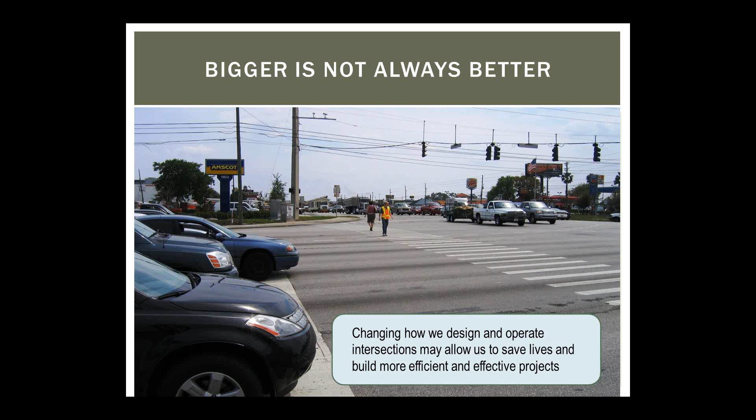So the traditional fix of building bigger intersections - bigger is not necessarily better. Bigger can be faster, bigger can mean more crashes. And from a pedestrian standpoint, I feel sorry for these poor people, they have to pack a lunch basically to cross from one side of the road to the other. So these innovative designs allow us to change how we think about intersections, how we operate them, and they can allow us to build not only safer intersections, but also more practical intersections.

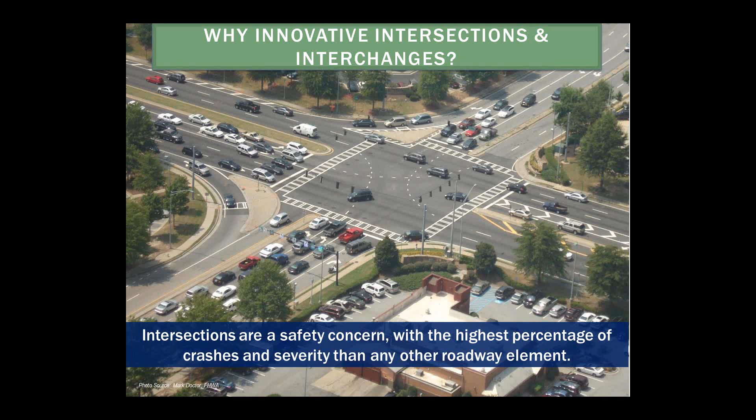Intersections are a certain safety concern. We know that about half of all severe crashes occur at intersections, based on national data. And if you think about it, an intersection is merely a point on a map - it is a very small percentage of the overall miles of the highway system out there. But yet, intersections account for about half of the severe crashes that occur on our networks.

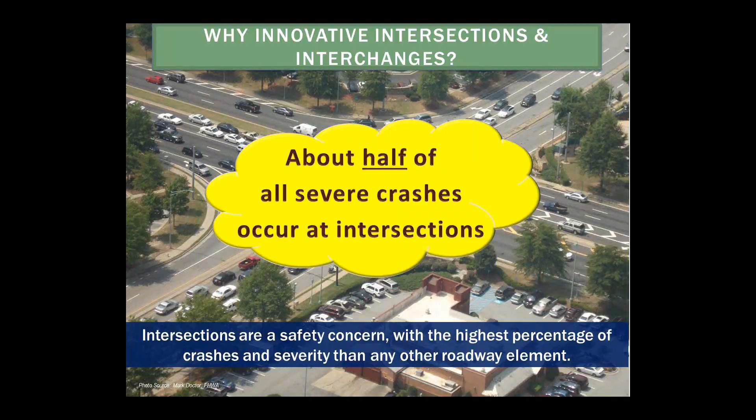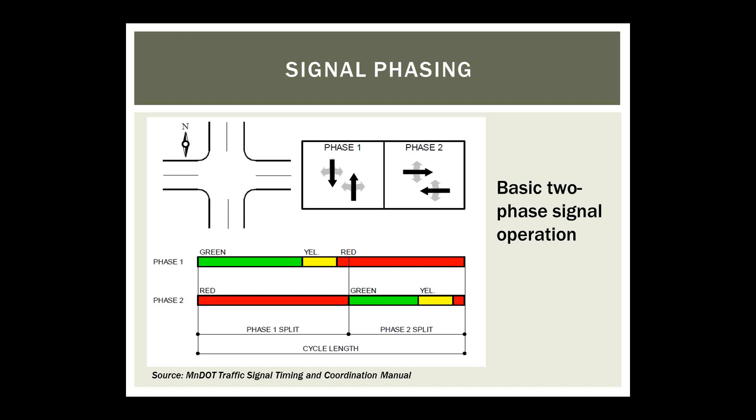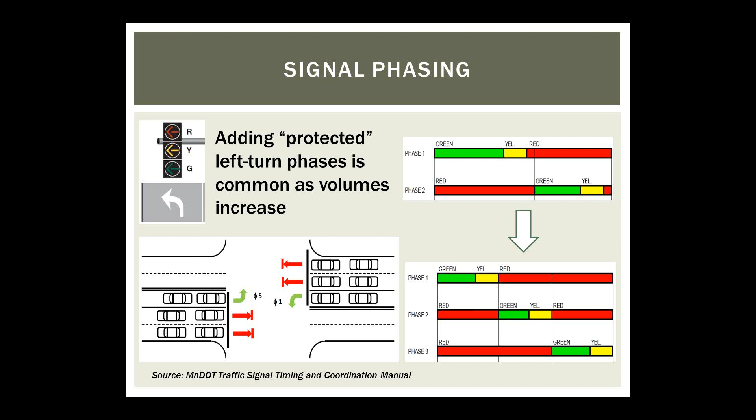What typically happens at intersections when the volumes start to pick up, especially the left turn traffic demand, is we add a protected left turn phase - that's the green arrow. And anytime we add a phase to the intersection, we are essentially eating into the amount of green time available to the other movements.

So if we think about providing for all the movements at an urban intersection: we start with a protected left turn phase for the major approach, add a yellow clearance interval and then maybe a little all red, then let the through traffic proceed in that direction with some green time, terminated by a yellow clearance interval and an all red. Then we go to the minor street - sometimes the minor highways have a lot of traffic as well, so we provide a protected left turn phase for them with green time, a yellow clearance interval, an all red, and then the side street or minor highway through movement gets their green time, followed by a yellow clearance interval and an all red.

So if you think about it, we're basically allocating time, allocating pieces of the pie, and no matter what our cycle length is - whether we're dealing with 120 seconds, 180 seconds, or sometimes even greater - long cycle lengths can work against us as well. They can really create lengthy queues while folks are waiting for the light to turn green. But no matter what cycle length we're dealing with, there are only so many seconds within that cycle length, and we have to figure out how to carve it up.

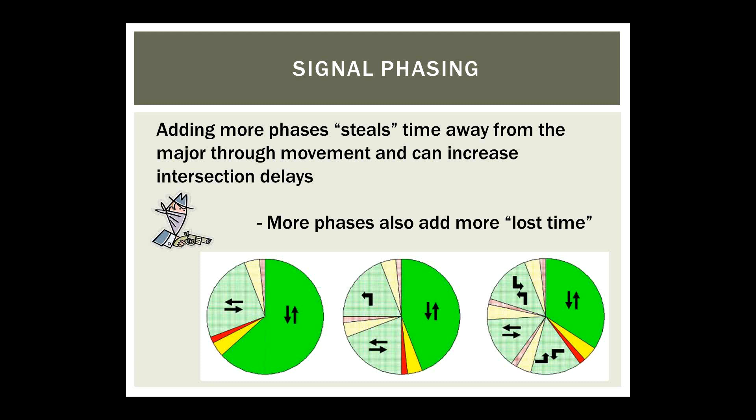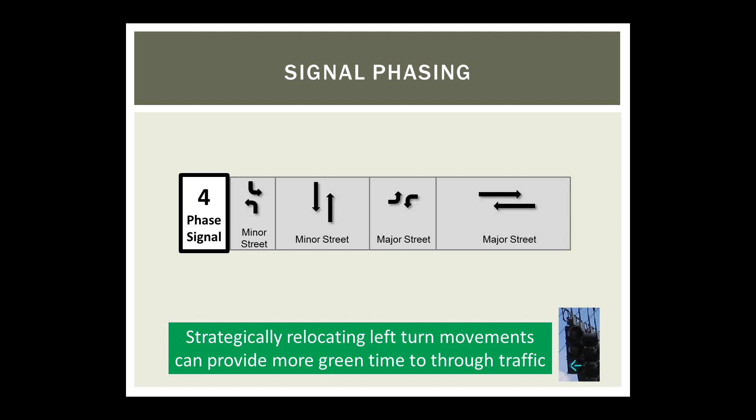So what we try to do with many of these innovative designs that involve signalized intersections is basically tweak the signal timing and come up with creative ways to handle the left turn movements. So, being able to take the typical 4-phase operation with the protected lefts from both the major and minor, and strategically alter that by relocating or redirecting the left turn movements, handling them in some other way, and getting back down to a 2-phase signal operation.

It gives more green time to the major street through movement. And it may seem like a trivial thing, just adding an extra 15 or 20 seconds of green time to the major street through movement. Well, it's not trivial. That additional green time has almost an exponential function where the benefit, the reduction in delay, increases greatly if we can provide additional time to keep the major street moving.

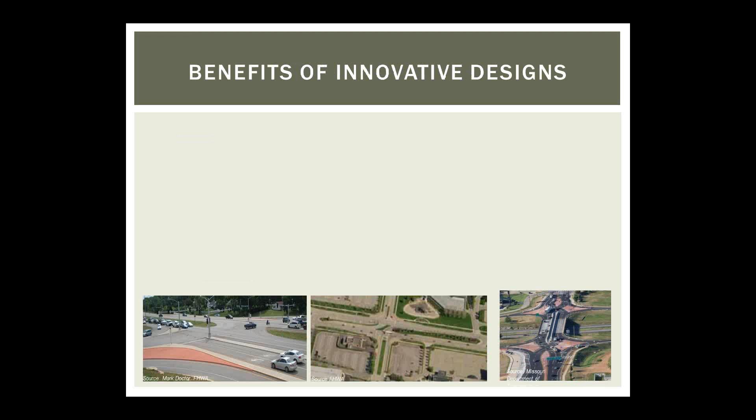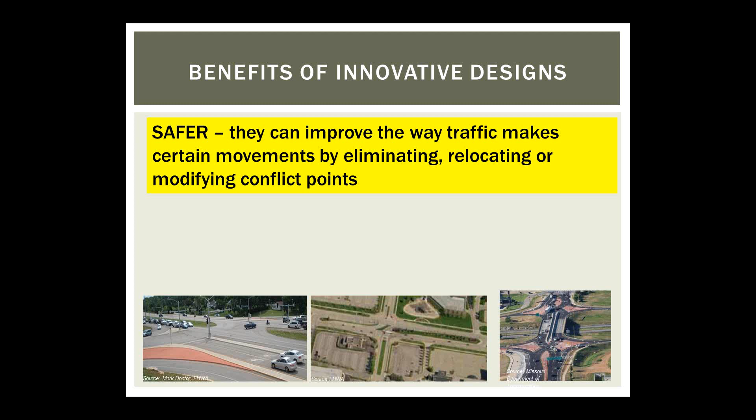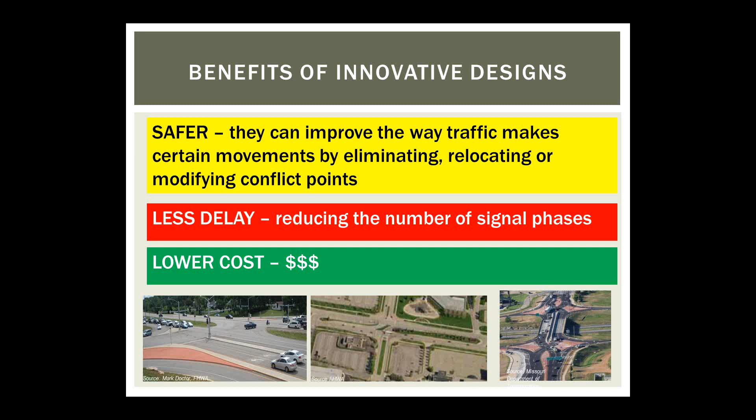So these innovative designs, many of them do involve improved operations, but at least the ones we're going to talk about today have also been proven to enhance safety and reduce crashes by reducing the conflict points or the type of conflicts that occur at the intersection. So not only are they safer and do they offer less delay, but in many cases these can also be lower cost alternatives. I almost sound like an infomercial, but wait, there's more. So in addition to safety, we have better mobility, and often at lower costs. That's really the exciting thing.

So just in summary for this quick introduction about signal phasing: fewer phases are better, and it's usually the left turns that are problematic. If we can get down to a 2-phase operation, that can be a really good thing. So my mantra for many of these designs to consider is 'all rights is all right.' All right, the jokes keep getting worse, but I want you to keep that in mind. So an intersection where we have the right turns and a displaced left turn can be really, really advantageous.

So let's think about some of the common issues, especially from a safety perspective. In this case, let's take a 4-lane divided arterial, a higher speed condition—it could be more of a rural highway, 4-lane divided, open median. We have a minor street intersecting with a major highway, and the minor street has stop control. The major street is uncontrolled, but coming from the minor highway, you have a stop control.

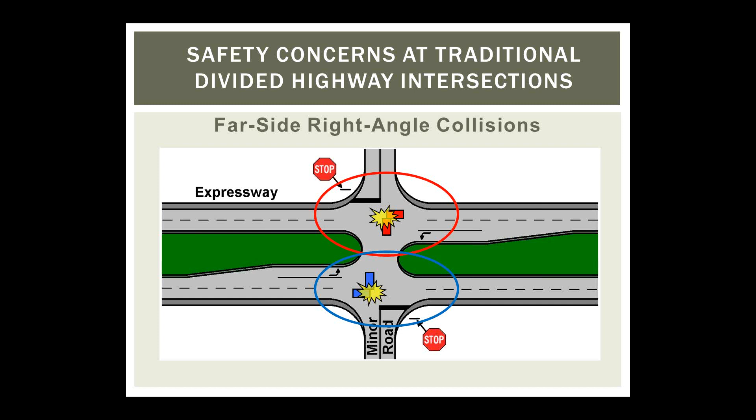So one of the very common safety concerns at this type of intersection is far side right angle collisions. As drivers, we do an okay job of assessing for gaps in the near side of traffic, but where we sometimes struggle is in the far side when executing either the left turn or the crossing maneuver, and so we oftentimes see a lot of far side right angle collisions. They tend to be high speed and high severity crashes.

So one of the safety mitigation strategies, and one of the innovative intersections that can be applied in that type of scenario, is the restricted crossing U-turn, the R-cut, but it goes by other names. It's also known as the J-turn intersection, and it also goes by the name of the reduced conflict intersection—in Minnesota, MnDOT utilizes that term, reduced conflict intersection, which seems to go over well in terms of marketing that to the public. It's also known as a super street in North Carolina; you'll hear them refer to it as a super street design, or sometimes the synchronized intersection.

But no matter what we call it, it is an at-grade intersection with a directional median, and the directional median requires that traffic coming out of the minor highway must make a right turn and then a U-turn to come back if they wanted to make either the crossing maneuver or the left turn onto the major highway.

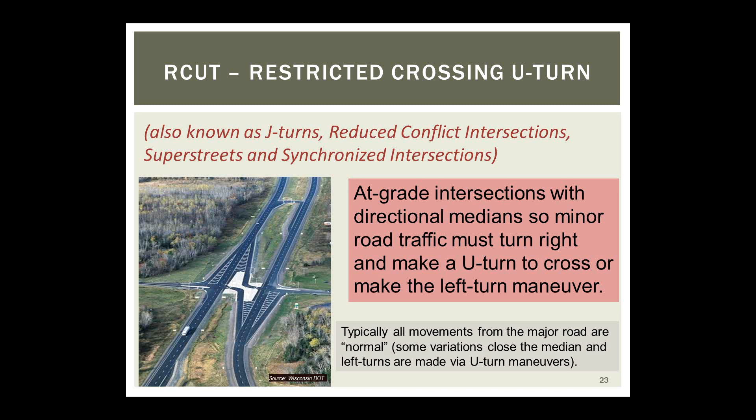Now from the major highway, all movements are permitted. From the major street perspective, you can make a right turn onto the minor highway, you can make a left turn onto the minor highway, and obviously you can keep going straight through. The only difference is for traffic coming out from the side street—the only possible movement is to make a right turn, and if traffic wanted to make a left or the crossing maneuver, they would utilize the downstream U-turn bay to come back. So that is the key difference.

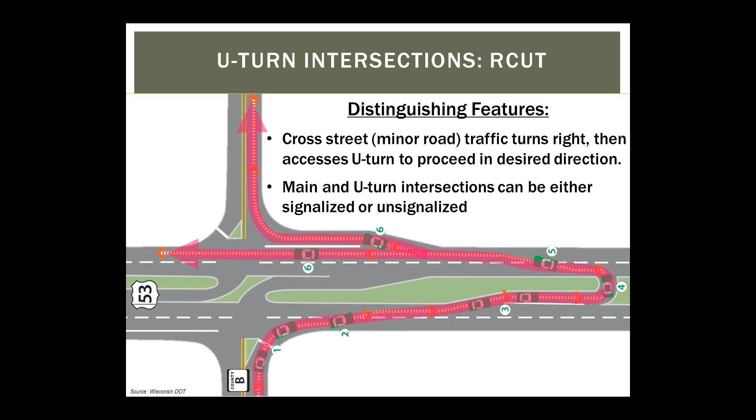Traffic coming out of the minor highway makes a right turn and then utilizes a downstream U-turn maneuver to come back to either execute the crossing maneuver onto the other side of the minor highway, or what would be a left turn. This can be applied at either an unsignalized intersection or a signalized intersection that creates gaps for traffic coming out of the minor street.

So when thinking about this type of intersection, I'll refer to it as the restricted crossing U-turn, but it does go by other names. It's a traditional intersection from the perspective of traffic on the major highway - through, right, left turns can all be made. The only difference is coming out of the minor street, the indirect movement would be for the left turn or for that crossing maneuver. This type of intersection can be applicable at a signalized or unsignalized intersection.

It can be in a rural application, a suburban corridor, such as a signalized arterial. Probably not going to see significant application in the urban center, primarily because of the type of highway we're dealing with and because we may not have the space. That's not to say it couldn't be possible, but more than likely this is going to be a suburban type of corridor, and primarily on a high-speed, multi-lane arterial, probably not on a low-speed route, although the concept could have application. That's why I put the question mark there and not necessarily a no.

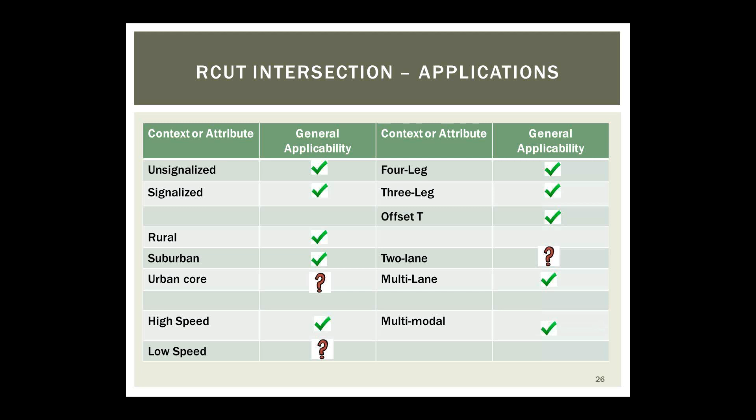These can be utilized at a four-leg intersection, three-leg intersection, T intersections, or offset Ts as well. Primarily going to be multi-lane highways, although some agencies are looking at similar concepts even on a two-lane highway, one lane in each direction. But we haven't seen anything built to this point. And yes, all multimodal features - we'll talk about how pedestrians and bicyclists can actually benefit from this design.

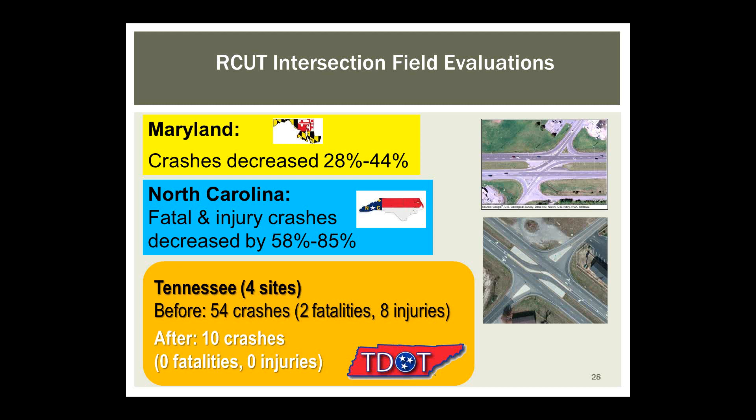All right, so the states that have implemented this design have seen very impressive safety results. Maryland has utilized this design for many years, and crashes decreased on the order of 28 to 44%. North Carolina has had many successful implementations, 58 to 85%. These are great numbers - crash reductions that rival roundabouts. And Tennessee has a few examples with very impressive safety results as well.

Now there is a slight distinction between the unsignalized version and the signalized version. In North Carolina they would call this the super street. Here's an example where traffic coming out of the minor street has a gap created by the signal, and the U-turn location further downstream is also controlled by a signal. So even though in this application you would think the arterial now has an added signal, the reality is traffic on the arterial only stops once.

The signals are tied together, they are coordinated, and once traffic proceeds through the first signal on the arterial, they would then proceed through the main intersection downstream. So traffic only stops once.

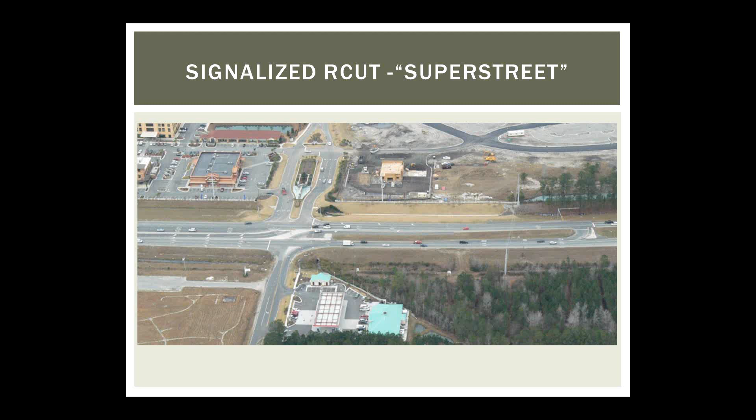In addition to being a great safety application in the rural environment, they're also very useful when we have a proliferation of four-phase signals because of new development. So new big box stores start to pop up, and what was perhaps previously a four-lane arterial that could really move a lot of traffic now is starting to see signals pop up everywhere to handle the new development.

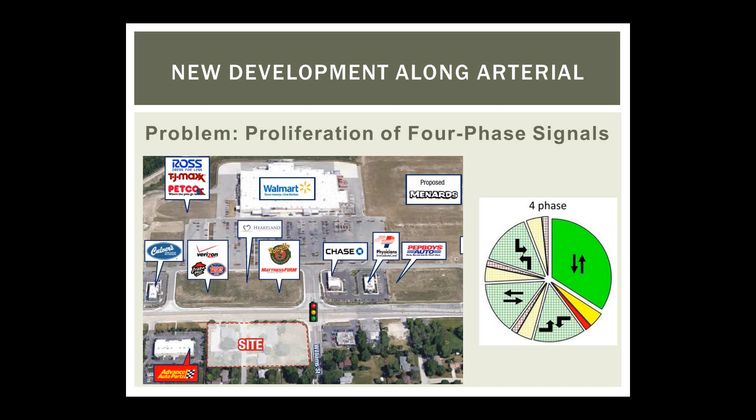Rather than traditional four-phase signals with protected lefts that can quickly bring that arterial down rapidly, if we were to go to a corridor of two-phase signals, the super street type of design really opens up a lot of advantages operationally. Instead of giving time to protected left turns, with the super street operation we're down to two phases - the right turns out of the minor highway take place concurrently with the U-turn maneuvers, so it is just a two-phase operation.

Even though there are essentially four signals now involved, they are operating essentially as one. By bringing it down to two phases, it may actually open up the possibility of a shorter cycle length, and that shorter cycle length gives us even better operational advantages as well.

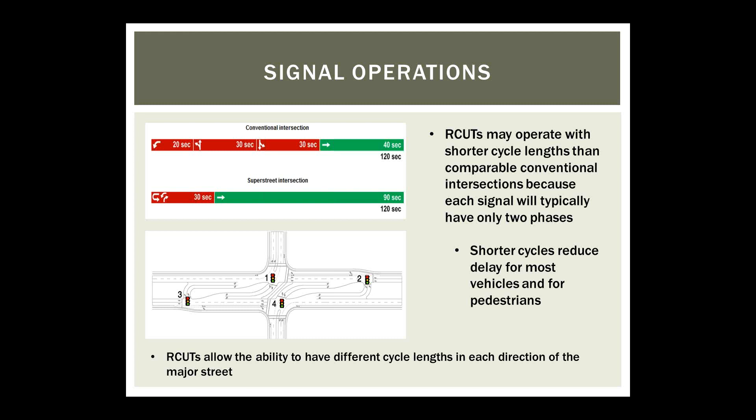If we put these in a corridor type of application, another advantage is that at no point do we need to stop both directions of traffic at the same time. In this example, you see an eastbound and a westbound on the major arterial. Those movements essentially can operate like one-way pairs. We never really need to stop the two directions simultaneously like we would at a traditional intersection to provide for the left turns out of the minor highway. So each direction may operate essentially independently.

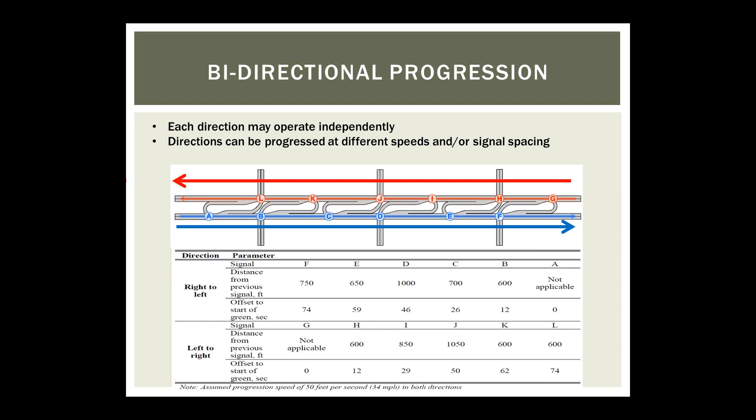What that allows is some very innovative signal timing design. It's a lot easier to coordinate progression on a one-way street than on a two-way street, and other innovative things could be applied. Let's say we're in an urban area with a very heavy directional split. Maybe in the morning peak, traffic is primarily heading in one direction, and in the afternoon it reverses. It's even possible to utilize different cycle lengths for the two different directions and alternate it by time of day. So all kinds of innovative, flexible signal timing opportunities are opened up when we implement this type of design in a corridor.

So what about for pedestrians? It's certainly a little different, and that depends on which movement we're talking about. For a signalized restricted crossing U-turn, it essentially utilizes this Z-shaped pattern for the pedestrian crosswalk.

To cross the minor highway, if we wanted to go say from A to B or C to D, that could actually be a shorter crossing distance, and the pedestrian could get from A to B or C to D probably in less time compared to a traditional intersection. But there's a disadvantage, say, to go from A quadrant to the D quadrant. There's an extra crossing involved, and to go from one side of the major highway to the other involves going out into the median, typically done in 2 stages.

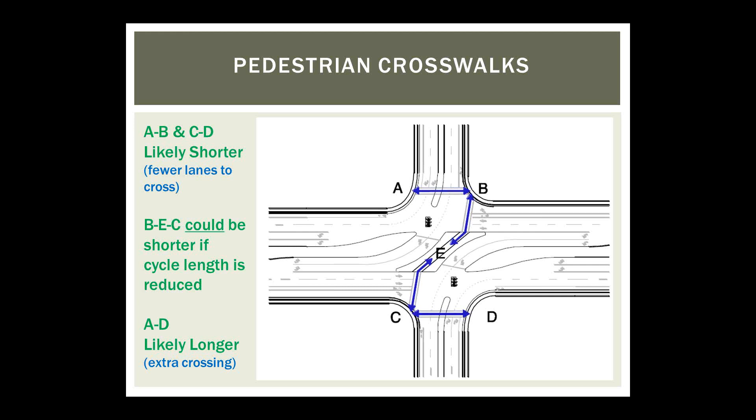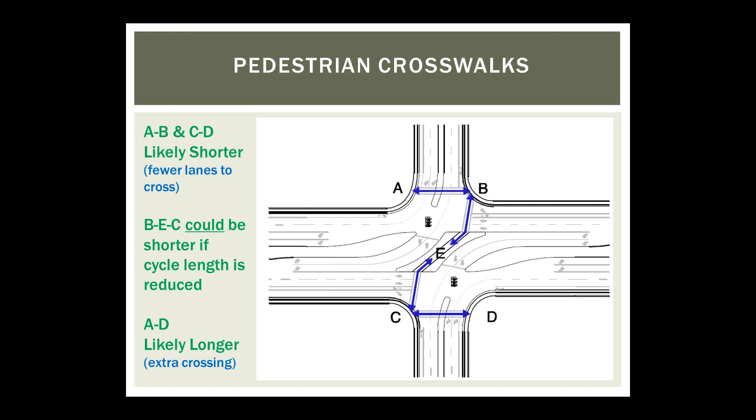So the question of whether it's longer or shorter for pedestrians - it depends. A couple of the crossings are probably going to be shorter, and the B to E to C crossing may actually be shorter, especially if we can bring the overall cycle length down. But the A quadrant to D quadrant crossing most likely is going to take longer because there's an extra crossing involved. But this is generally what it looks like, and you can see the pedestrian going out into that center channelized island.

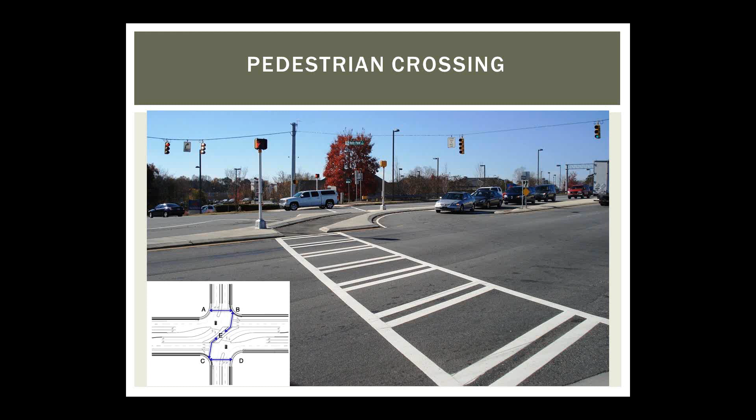It's one of these things where until you experience this intersection as a pedestrian, it may look intimidating. And I want you to be skeptical - I want you to think, how is this really going to be for pedestrians? Well, the reality is, if you get an opportunity to walk through one of these intersections as a pedestrian, I think in most cases you might be pleasantly surprised. We have to also keep things in comparison, because we're talking about a big, busy intersection. I want to compare apples to apples - we're not talking about a low speed, low number of lanes intersection. So in comparison to other high volume type intersections, I actually think there are many opportunities to design and create some pedestrian advantages with this type of intersection.

Let me show you some examples of how we can even enhance things from a pedestrian standpoint.

If we have the opportunity to go with an offset type of intersection—for example, in a corridor where development is just starting to occur—we have choices as to where we might locate this driveway entrance to a big box store seeking a permit, with the development still in the planning stage. So if we have opportunities in terms of where we locate these approaches, we can create an offset type of option.

This actually allows the pedestrian crossings to be more intuitive, and the median could be utilized as a pedestrian refuge area. So something like this, with the offset approaches option, makes the intersection more traditional from the pedestrian standpoint, and can actually be a very pedestrian-friendly type of intersection option.

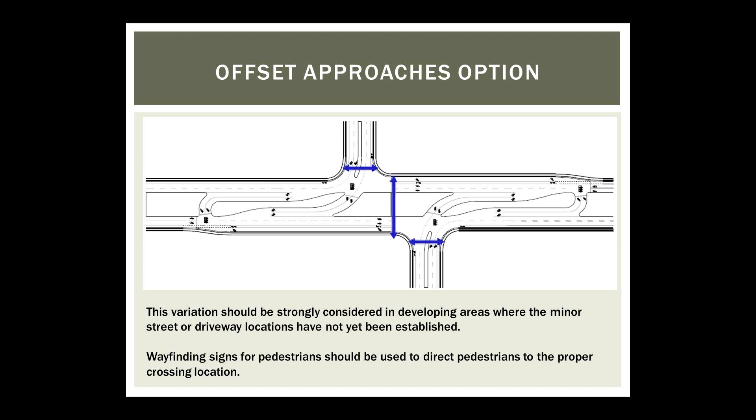Another consideration for pedestrians is at the locations where U-turn movements are occurring. If those are signalized, and traffic on the major arterial is going to be stopped to allow for the U-turn maneuver, it opens up the possibility of having mid-block pedestrian crossings that really don't hinder the traffic operations.

So adding mid-block pedestrian crossings without adding any delay, essentially, to vehicular traffic gives us an opportunity to perhaps make these designs even more beneficial to pedestrians. These mid-block pedestrian crossings will not interfere with the signal progression.

So if we had, say, a bike lane from one side of the minor street going to the other side, crossing the major highway, or if a bicyclist wanted to make a left turn—essentially the left turn from the minor street to the major street—that's where we have the differences.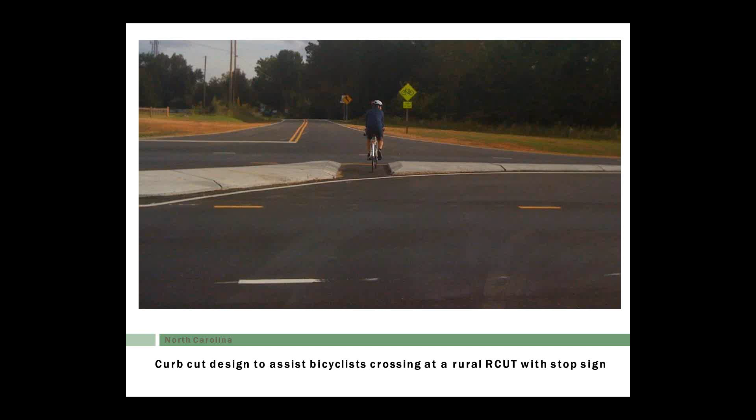But again, remember, from the major street perspective, there are no differences from the bicyclist perspective—everything is the same. It's only how minor street bicycle traffic may be affected.

So that's a description of the restricted crossing U-turn, or the J-turn. It goes by many different names.

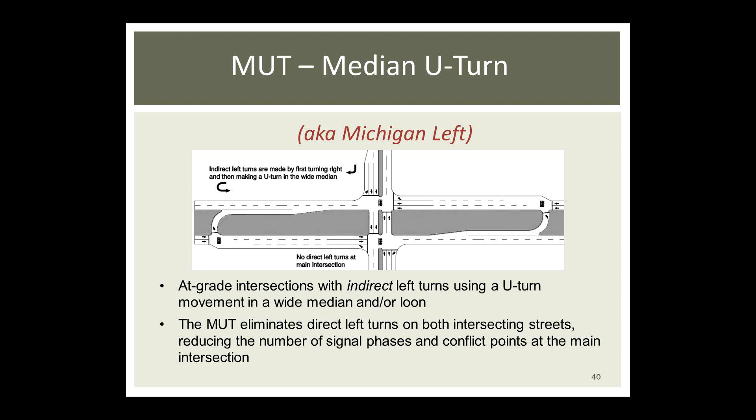From the minor street, if traffic wanted to make the left turn, they would make the right turn, utilize the U-turn bay, and come back, similar to the restricted crossing U-turn. But the key difference here is now the minor street through movement is permitted. So the major highway through and the major highway right are the same as a traditional intersection.

What's different is the major highway left turn. That's now made with that indirect movement going through the intersection, making a U-turn, and coming back. From the minor road, the through and right turn movements can be made the same as a traditional intersection. The only difference is the left turns, which are indirect left turns.

These are going to be signalized intersections, on a corridor, a signalized corridor, primarily in a suburban core. It's possible to have it in an urban core too — there are some urban corridors that do have a median that could be utilized. Probably not going to see these in a rural type of setting, since these are signalized intersections. Not to say you couldn't, it's just probably not a typical rural application. Mostly a higher speed corridor, though I guess there's potential also for a lower speed environment.

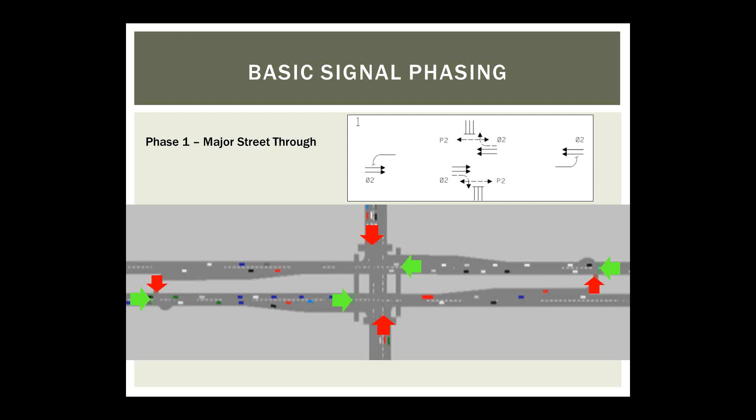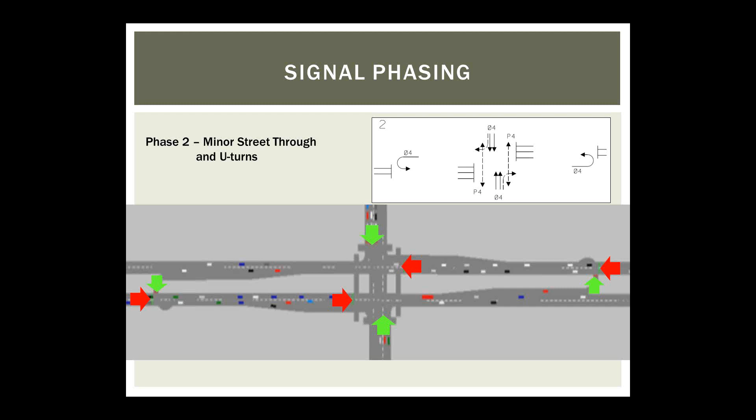These are going to be four-legged intersections on multi-lane highways, and we're also going to talk about the multimodal advantages of these as well. But the key operational advantage is the two-phase signal operation. So even if the U-turn locations are signalized, they essentially operate like one intersection. The major street through movement occurs in the first phase, then in the second phase the major street through movement gets stopped, and the minor street through movement proceeds, and at that same time the U-turn maneuvers occur. So we're down to a two-phase signal operation.

By doing away with those protected left turn phases, not only does it offer the opportunity to give more green time to the arterial through movement and reduce the number of clearance intervals and lost time, but as a result it might be possible to move the same amount of traffic with a shorter cycle length. This figure shows a case study where a before condition with a 150-second multi-phase cycle was converted to the two-phase operation, and with the same volumes, was able to process that traffic essentially in a 90-second two-phase cycle.

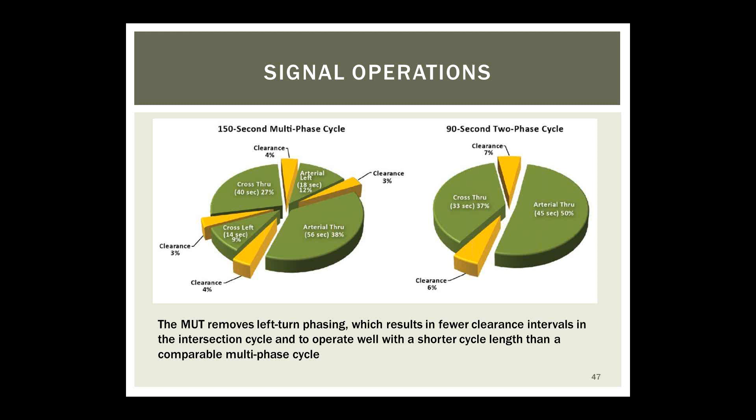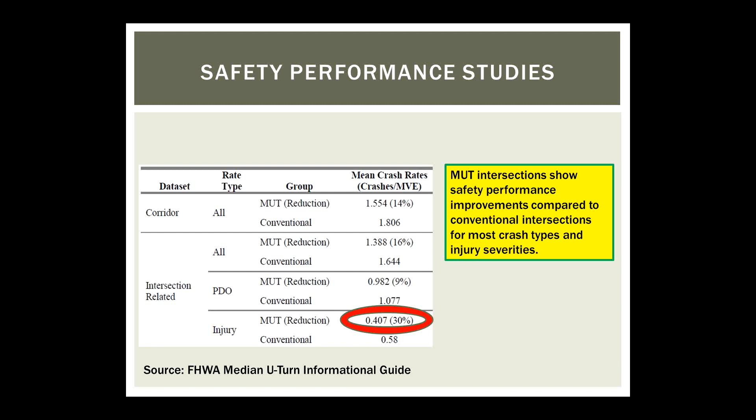Anytime we can bring the cycle length down, that gives us even more operational advantages for all users as well. It opens up the opportunity for more pedestrian crossing times within a given hour. So certainly operational benefits and safety benefits. In Michigan, where they have the most experience with this type of design, their studies show about a 30% reduction in injury crashes. Very, very impressive from a safety standpoint as well.

From a pedestrian perspective, that median offers opportunities to serve as a refuge area. Depending upon the specifics and how the signals are timed, it may be possible for a pedestrian, especially a fast pedestrian, to possibly cross in one stage, but more typical would be a two-stage crossing where the median is a pedestrian refuge — though it could be possible to cross the major highway in one stage. Crossing the minor highway can be done in one stage, and that minor road crossing is probably very typical, much like a traditional intersection.

One added advantage from the pedestrian standpoint is there are no left turns being made at the main intersection. From a pedestrian and vulnerable user standpoint, left turns are often a challenge or safety concern, especially with a permissive left turn. Under the permissive case, a driver's attention is primarily focused straight ahead, looking for gaps in oncoming traffic, and may not be paying attention to the pedestrian in the crosswalk. If they get a gap to make the left, that turn over the pedestrian crosswalk is often a very serious safety issue at traditional intersections.

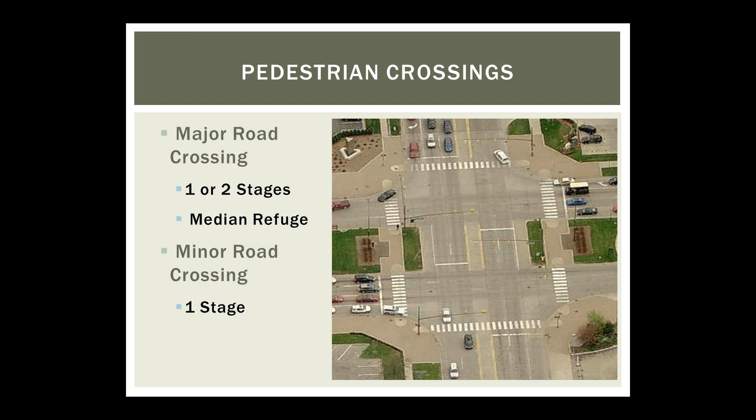Because there are no left turns at this type of intersection, that does away with a conflict that can be very problematic to pedestrians. So that's another potential advantage.

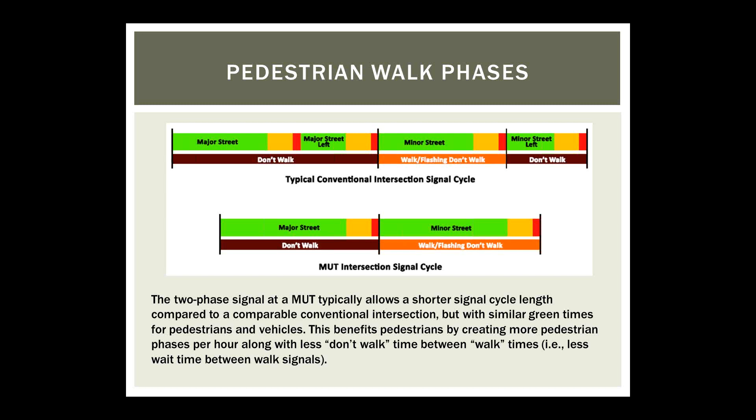If we can bring down the overall cycle length, and because we're down to two-phase operation, it's advantageous to pedestrians in terms of the number of walk indications during a given hour, and also an opportunity for a longer walk interval. So there are opportunities to improve the pedestrian crossing.

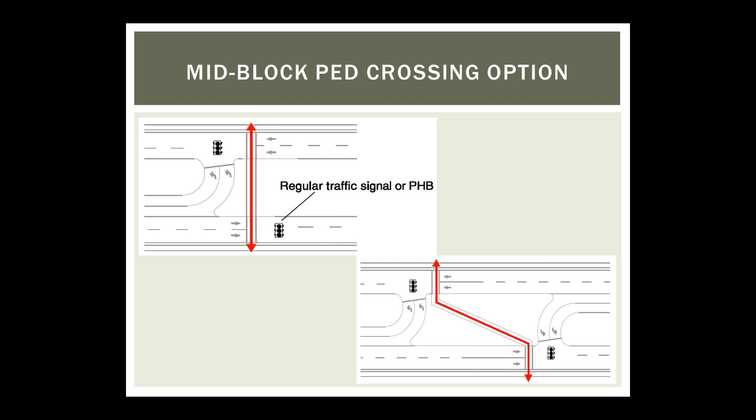Plus, just like we discussed with the restricted crossing U-turn, if those mid-block U-turn locations are signalized as well, it opens up the possibility to provide a protected mid-block pedestrian crossing without affecting operations to vehicular traffic.

Now, for bicyclists, the difference would be with the left turns. Through movements are basically going to proceed normally, just like vehicular through movements are normal at this type of intersection. It's the left turn that becomes different.

So there are options here as well. Certainly the bicyclist could be treated like a vehicle and expected to make the right turn and U-turn, but that's probably not the most desirable. There's always the option of being handled like a pedestrian and utilizing the pedestrian crossing.

But another potential innovation is the bicycle box, shown with the blue arrow in this diagram, where the bicyclist wanting to make a left turn proceeds with vehicular traffic when given the green indication. Once on the far side of the intersection, they wait in the bicycle box, reorient themselves—in this case to the east-west direction—and then when vehicular traffic gets the green to proceed westbound, bicyclists can proceed as well.

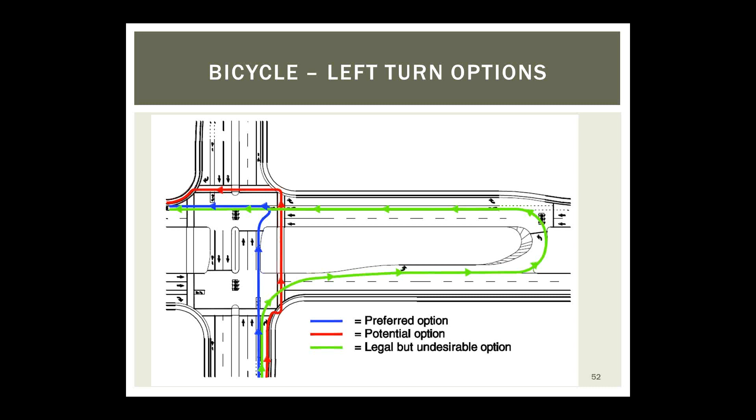This bicycle box concept is actually being applied at traditional signalized intersections as well, and it's perhaps a good way of handling left turn bicycle demand at higher volume, bigger signalized intersections. The concept could also be applied at the median U-turn, but it's really not different from a traditional signalized intersection. So if you're skeptical at this point, you might say, that's fine and dandy, but how do I apply this concept if I don't have a median?

What if I don't have this nice wide median to be able to build in those U-turn locations? Well, that's what we're going to talk about next—the concept of the loon design.

Other agencies have successfully applied this concept even on roadways that don't have a median. If we don't have a median, one of the concerns is accommodating the needs for making that U-turn maneuver away from the main intersection. So what can be done is the construction of these bulb outs, bump outs, or loons—some agencies call it a loon—but it's essentially a bump out or bulb out away from the main intersection to accommodate the U-turn maneuver.

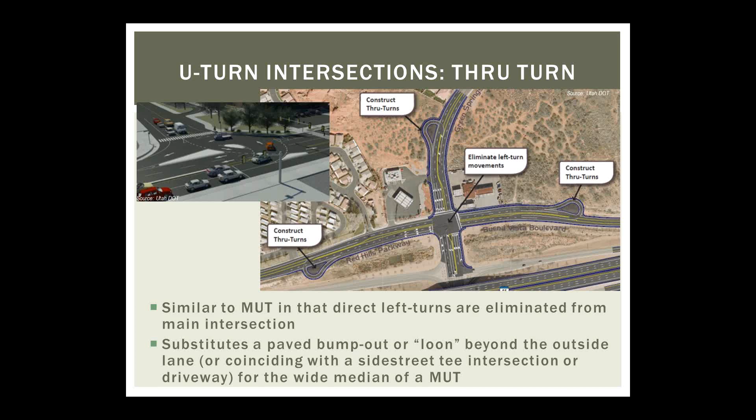In Utah, they call it the through turn, which helps with marketing, because to make a left turn, traffic proceeds through the intersection, makes a U-turn at a bump out or loon, and comes back to the main intersection to then make the right turn—that would be the left turn maneuver. So the concept can be applied even when we don't have medians.

In this example, the interchange itself is a single point diamond, which operates typically with a three-phase signal operation. If we provide protected left turn phases at the adjacent signalized intersection, oftentimes, especially if that intersection is fairly close to the interchange, if it starts to fail it can create queues that back up into the interchange. If the interchange intersection starts to fail, it can have a domino effect, backing traffic up on the exit ramp, and could possibly even back traffic up onto the mainline of the interstate. That domino effect is certainly a challenge we see in many urban areas.

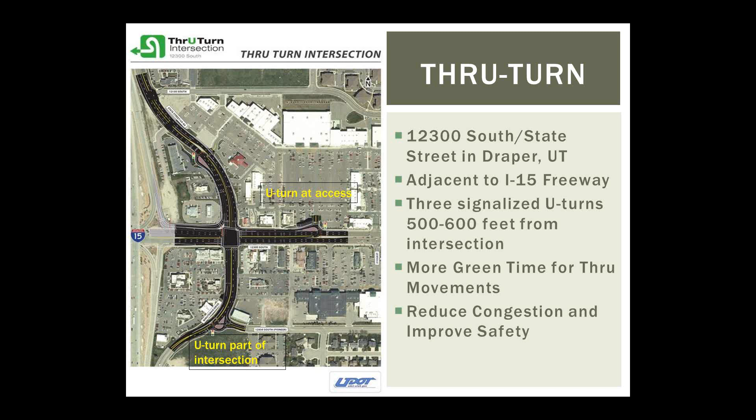In this example, in this retrofit, it was actually constructed as part of an existing three-leg or T intersection. Complicates things a little bit, but it still allows the concept to proceed. Then you see another example where the U-turn, the bulb out, also serves access into that big retail establishment up there. So let's take that same example, and let's focus on the one on the south, the U-turn that is in conjunction with the T intersection.

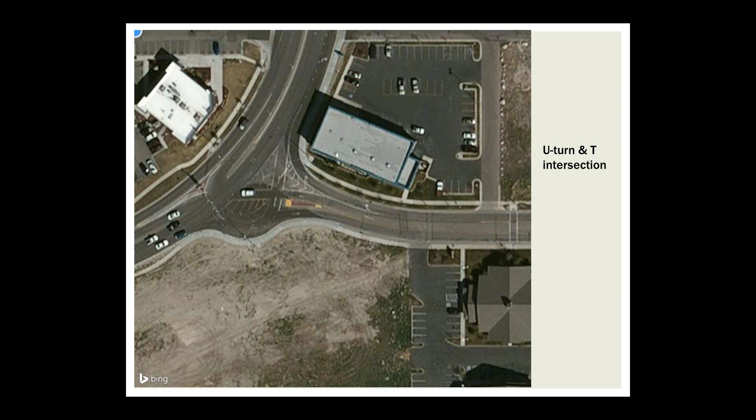This makes it a little more complicated because the signalized intersection here also provides for the left turn coming out of the minor street. But if you don't have any good choices to put an independent U-turn location in, it is always possible to do something like this, where it's co-located with a T intersection or possibly co-located with an entrance into a commercial area.

That diagrammatic U-turn sign, I'll throw in a little caveat here. In some of my pictures, you may see differences in how agencies have depicted this. There's actually a study that just recently got kicked off, a pooled fund study from the traffic control device folks, that's going to look into these diagrammatic type U-turn signs and do some human factors research so we can hopefully nail down what is a better arrow, perhaps the thickness of the lines, some of the subtle nuances. This gives you an indication of the general way it's depicted, but we'll soon have research available to get better information on the details for this type of sign, because we're seeing more and more of these applications utilized.

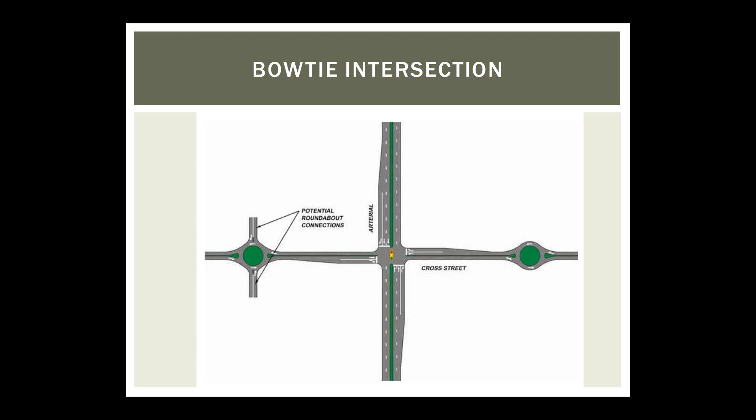So roundabouts, especially single-lane roundabouts, are very good at facilitating U-turn maneuvers. And you can see in the diagram, the roundabout on the right side of the figure isn't even a real roundabout. It's like a dummy roundabout just there to facilitate the U-turn maneuver. Perhaps it could facilitate a crossroad in the future, but a roundabout like that could be excellent at just facilitating a U-turn that could be implemented in conjunction with eliminating the protected left turn phase at the main intersection, getting it down to a two-phase operation.

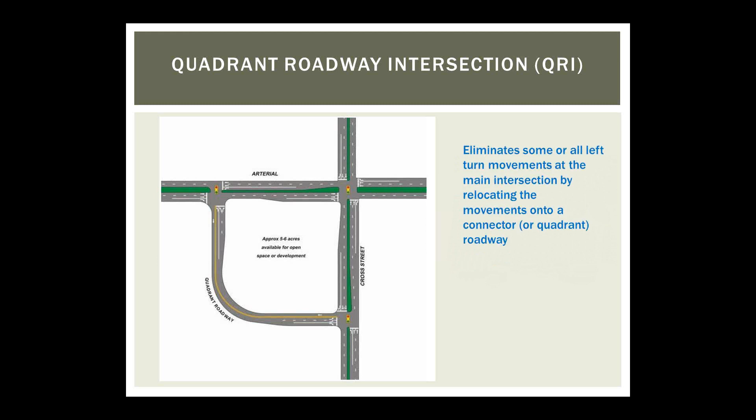So by eliminating some or all of the left turn movements at the main intersection and putting it onto a quadrant roadway, we're reducing the number of signal phases at the main intersection and giving a benefit.

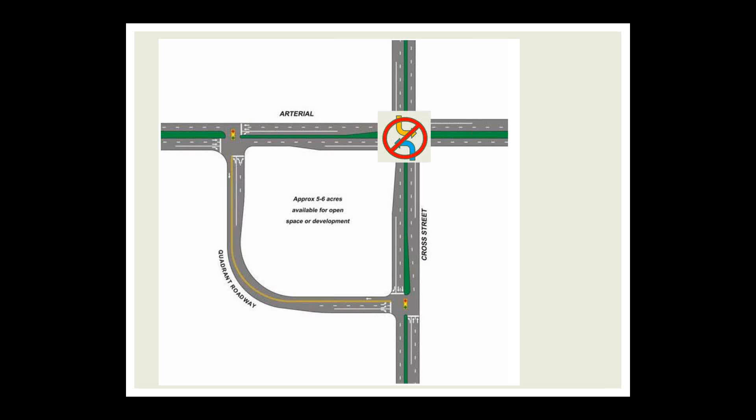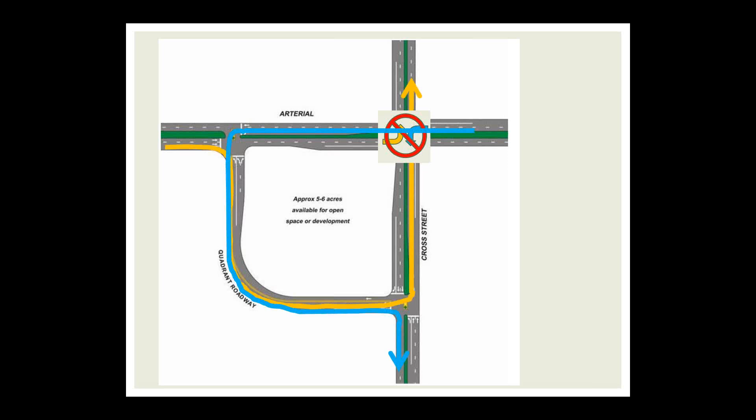So for example, we're going to take out the left turns at the main intersection. Instead of making the left turn directly, traffic could utilize the quadrant roadway. In the blue arrow example here, to make the left in the southbound direction, traffic would proceed through the intersection, make a right turn on the quadrant roadway, and come back. From the arterial, same thing. To take out the protected left turn movements, they can be redirected. You could utilize the quadrant roadway to come back, or in the case of the blue arrow, go through the intersection and utilize the quadrant roadway to come back.

A good case study is in Ohio, outside the Cincinnati metropolitan area, on bypass Route 4 in Fairfield, Ohio. And here it shows an example of a constructed quadrant roadway. The advantage being all the movements are provided for, just some are more indirect than others.

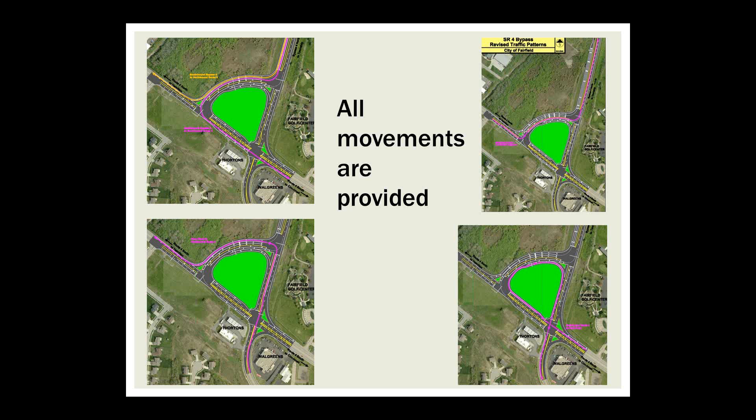The location of the quadrant roadway -- if you have a choice of which of the four quadrants of the intersection to locate it, some of the movements are going to be more circuitous, and some are actually going to be more direct. In this case, in this example, the more circuitous movements actually correspond to the lower volume, lower demand movements. That's always a bonus if the detriment is to the lower volume maneuver, and the higher demand movement actually gets the more direct route. So that's the quadrant roadway intersection.

Another concept that's been around for a while is the jug handle intersection. In New Jersey and Pennsylvania, you see a lot of these jug handle intersections.

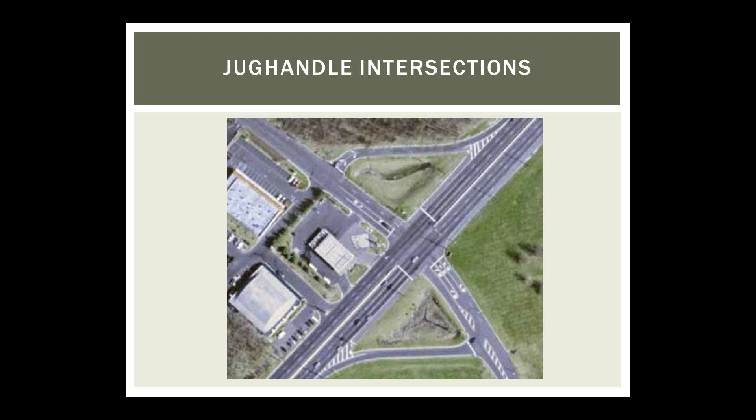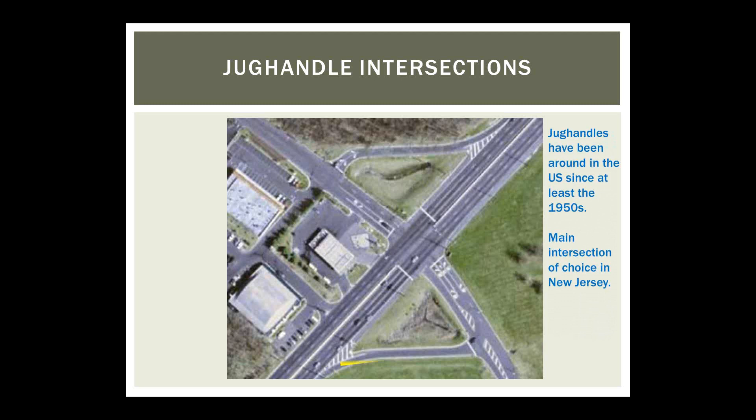The concept being, instead of making a left turn at the main, or from the main highway to the minor at the intersection, you utilize the jug handle. You execute the left turn by making a right turn and then coming back and crossing over. These jug handles have been around since the 1950s, and you see a lot of them in the New Jersey, Pennsylvania type area.

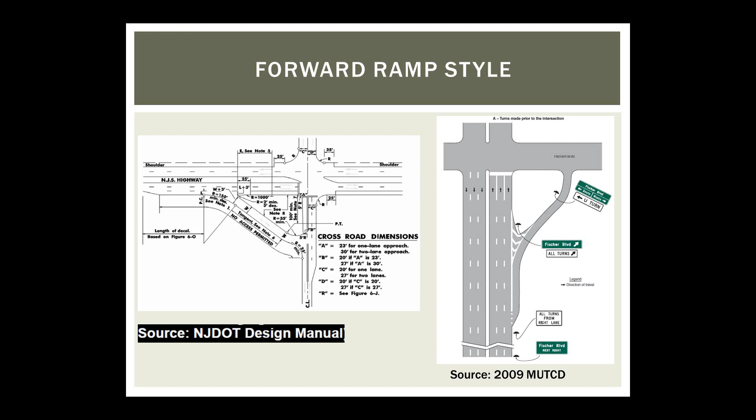The Federal Highway Administration put out a technical brief on jug handle intersections, discussing the operational and safety benefits. The Manual on Uniform Traffic Control Devices, the 2009 MUTCD, actually added signing for the jug handle type of intersections. The key message is getting traffic into the right lane and utilizing the jug handle to come back.

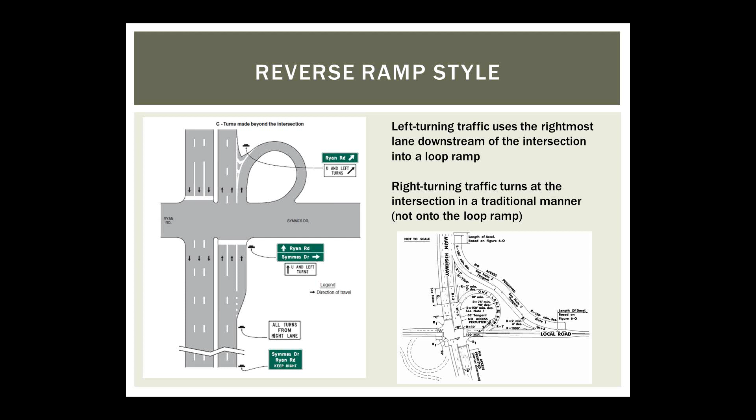There are different styles. There's the reverse ramp style. Again, this is an at-grade intersection, not an interchange, where traffic goes through, utilizes a reverse ramp to come back and cross over. They can also be in conjunction with T intersections or U-turn type jug handles.

Oftentimes these are put in on arterials with a divided median as part of access management, where traffic wanting to turn into driveways can't do so directly because of the divided median. So the demand for U-turn maneuvers kicks in as traffic wants to essentially make the U-turn to come back and enter into driveways along the corridor.

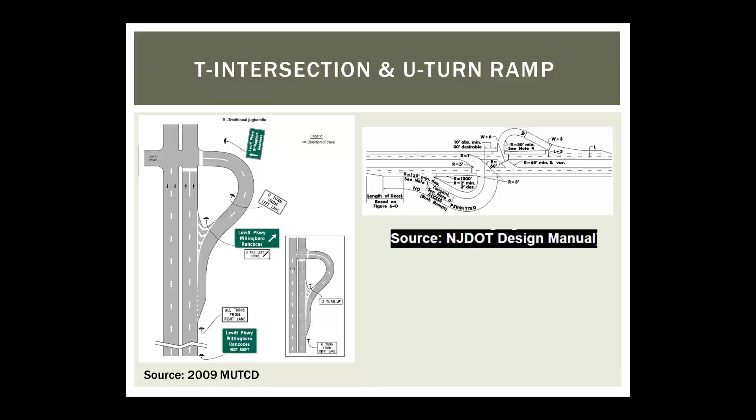The key message: all turns from the right lane. This is an example from New Jersey, where you get onto the jug handle, utilize it to come back, and at the main intersection there are no turns.

It is a two-phase operation: give green time to the major street, stop that, then green time to the jug handle or the minor highway. By not having the protected left turn phases, it makes the operations at these two-phase signals very, very slick. So another concept I want to cover, as we kick up to a higher level of traffic volume demand at a signalized intersection, is the displaced left turn intersection, also known as a continuous flow intersection.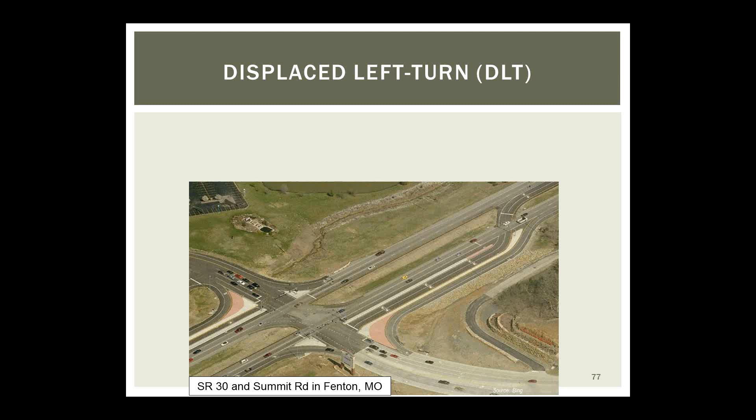The key distinction of this type of design is that the left turn movements on one or more of the approaches—in this case just the left turns on the major highway approach—actually cross over onto the other side of oncoming traffic.

We displace the left turn bays in advance of the main intersection. Once traffic is on the other side of oncoming through traffic, those left turns can then proceed simultaneously with the through movement. In other words, the protected left can essentially occur at the same time that the through movement on the main arterial is taking place.

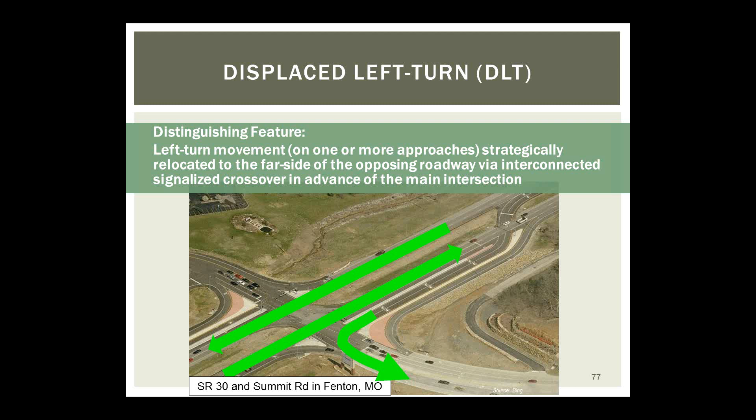So it still provides that protected left, and still handles a very high left turn demand, but without the need for the exclusive left turn phase. Depending upon how many approaches, this could be done from both the major highway left turns and the minor highway left turns, but predominantly we see these on one or two approaches on the main highway.

Here's an example of one at a T intersection. This is actually the first displaced left turn intersection in the United States, on Long Island. It was an intersection that served a college, with a high left turn demand into this entrance, and this was the first displaced left turn intersection built in the U.S.

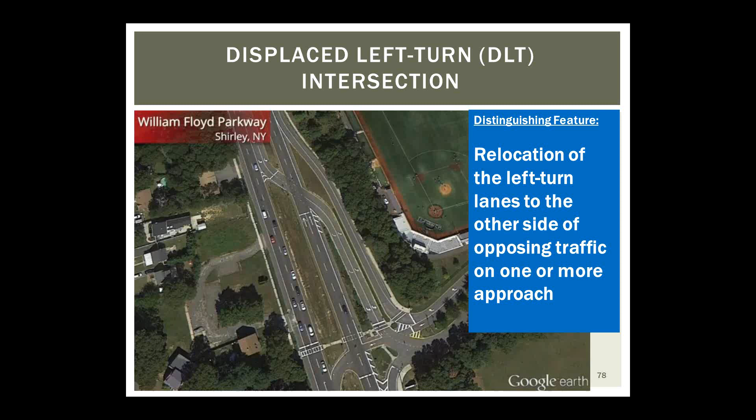It shows how it operates in advance of the main intersection—you can see those two left turn lanes develop, and then the signalized crossover. Even though we have two signals, the main intersection and the signals for the displaced left turn, they operate like one. They are coordinated, and traffic on the main highway, once they proceed through the first intersection, will also proceed through that downstream intersection.

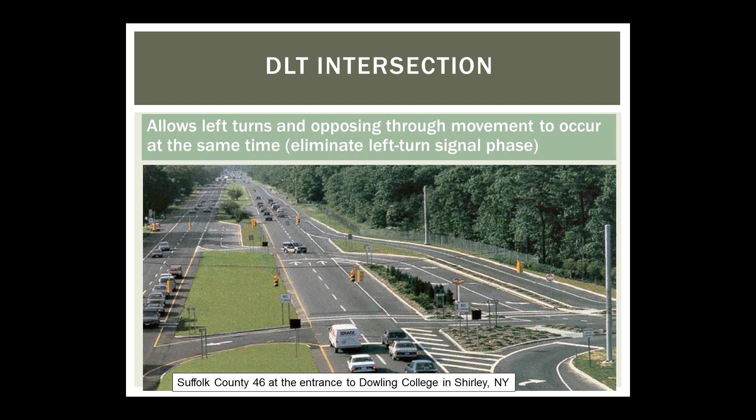So the displaced left turn intersection, or continuous flow intersection, these are going to be signalized, primarily in your higher volume suburban corridors. We have seen applications on high volume rural signalized intersections as well. Probably not something you're going to see in the dense urban core, but where urban and suburban kind of blend together, certainly there's that possibility. Primarily on a higher speed, higher volume type of roadway, can be a four-legged or three-leg intersection, and these are typically going to be multi-lane, at least for the major highway.

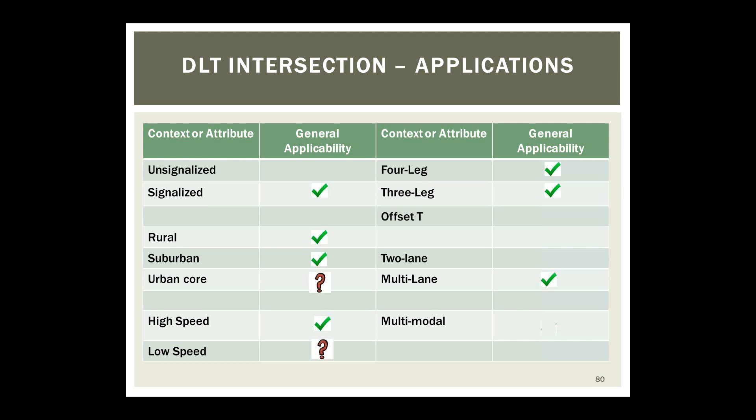Yeah, multimodal opportunities here as well. But I do want to say that perhaps the overarching consideration with this type of intersection is your access management issues, especially at the quadrants of the intersection.

If we're dealing with an existing intersection and contemplating utilizing this concept to improve or retrofit it, one of the big factors is the type of land use at the quadrants of those intersections, primarily the size of the parcels and the driveway needs. For example, if we're dealing with small parcel sizes like a fast food restaurant, that's a big difference compared to a car dealership, where we may have more opportunities with regard to where those driveways get located. So access management issues are certainly a big part of the overall feasibility of this type of design.

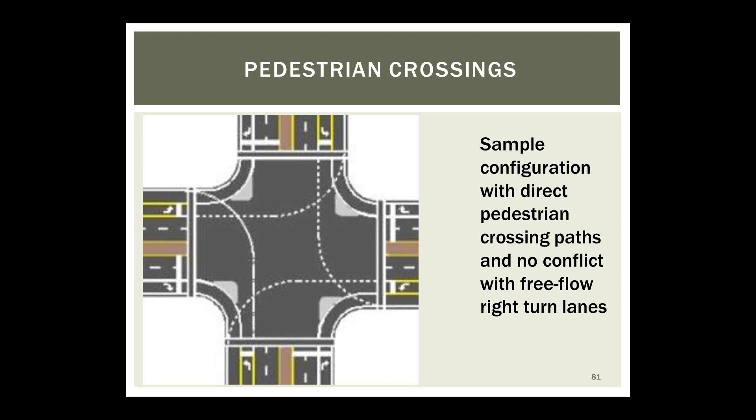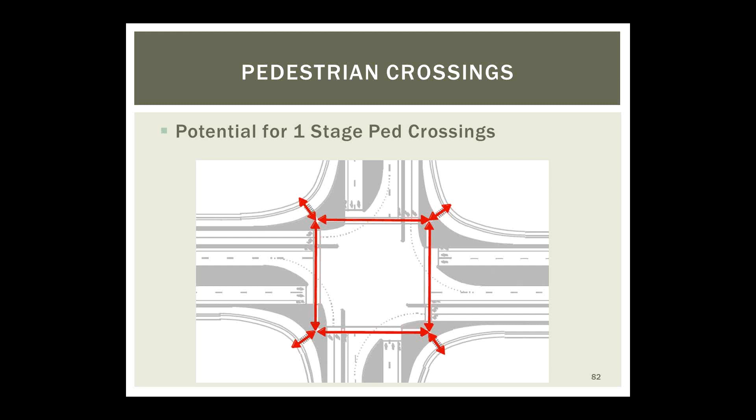From the pedestrian standpoint, we have some choices. In this sample configuration, this is a more traditional type of pedestrian crosswalk location, going across the right turn lanes and the displaced left turn lanes. But what's probably more common is utilizing the channelization and the potential for one-stage pedestrian crossings, though how that fits within the actual size of the space you have available at an intersection can vary. It is possible to put in what could be some more traditional looking pedestrian crossings.

If we can further expand the use of channelization—here in this example, the channelization between the displaced left turn lanes and the through lanes—it can provide an added refuge area. It can even bring the crossing lengths down even shorter, and also eliminate that potential conflict between the walk indication and having to hold up the displaced left turns. Obviously, you can't have the left turns proceed when pedestrians are in the crosswalk. So there are choices, but also some trade-offs with regard to the operational advantages for getting those left turns to proceed versus having the added channelization for pedestrian refuge islands.

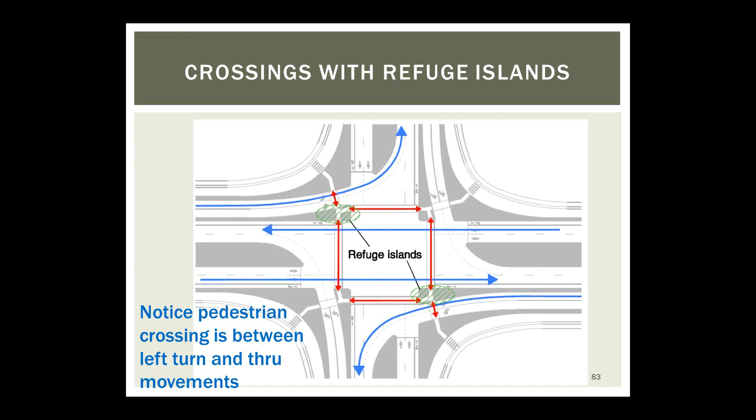But overall, there are opportunities to get pedestrians across. Some crossings might be longer, but some might actually be shorter as well. So I know I haven't given you all the information you probably need, and I hope I've whetted your appetite and you're wanting more information.

So I want to put in a plug for the Federal Highway Administration's informational guides on these designs we talked about: the median U-turn, the restricted crossing U-turn, the displaced left turn also known as the continuous flow intersection, and another informational guide on the diverging diamond interchange. Hopefully most folks have heard about the diverging diamond interchange. We could spend a whole webinar just talking about that interchange type, but there's also a great informational guide out there on that grade-separated interchange style.

Today we just focused on at-grade intersections. All of these references, the informational guides as well as other resources, including information on roundabouts—we didn't want to highlight roundabouts today because that's another topic that stands alone by itself. But if you go to our FHWA intersection safety webpage, and I've given you the address there, you can download all of these references. The FHWA informational guides are in PDF format and can be downloaded for your use.

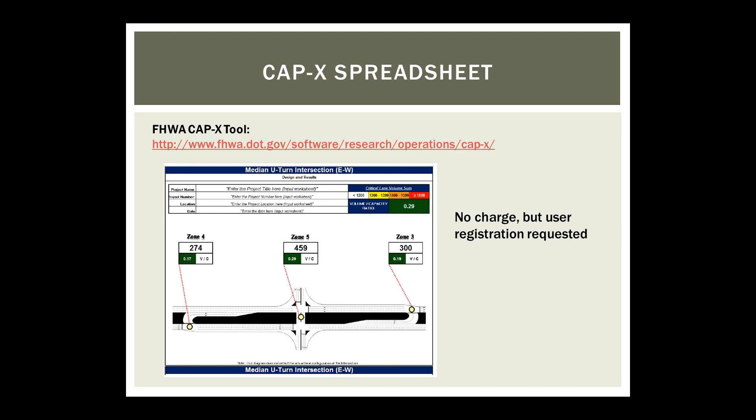So the CAP-X spreadsheet tool has certainly been very, very useful. With that, we've got one more poll question—Anthony, if we could open it up to our last poll question.

So now that you've seen an overview of these innovative designs, getting back to how we kicked things off—how do you feel about these? I'm liking the responses I'm seeing. This is great, it's a pretty good mix that can't wait to try one out. And still, I'd like you to be skeptical, but open-minded, and hopefully a little more confident in where these designs may be applicable. I'm hopeful they can be a good solution for some intersection challenges you may be struggling with in your agency. So with that, Anthony, I guess we're at a good point to continue with Q&A.

Sure. I believe the CAP-X spreadsheet kind of answers one of the questions, but there was a question about the level of traffic volumes that will be warranted for the different types of treatments. I think the CAP-X spreadsheet would allow a user to punch in the numbers and see the operation, and kind of compare and get a list—or is there already a table somewhere that says, if you have these kinds of volumes you should consider this, and if you have these kinds of volumes you should consider this instead.